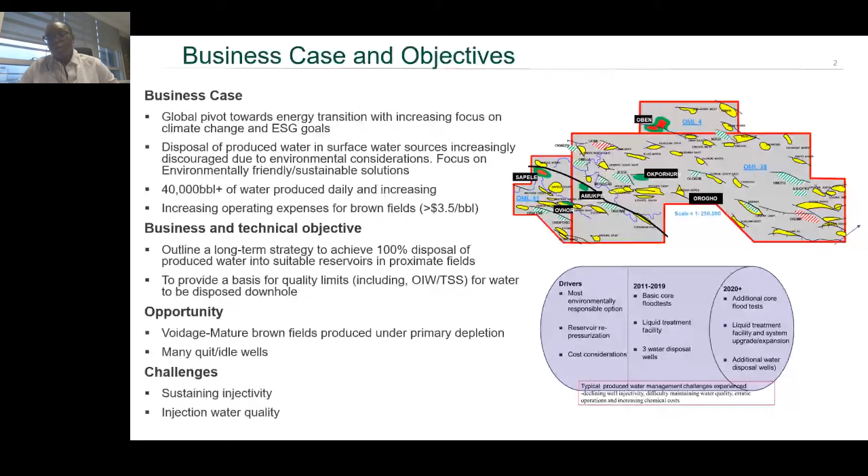The first step we took was to look at it in an integrated manner, bottoms up. The first question we asked ourselves was how do we select the reservoirs within which we would inject this water. We came up with about 9 screening criteria cutting across key properties. I would say accommodation space: we need a large enough tank to take this water. We looked at a cut of about 35 to 40 million barrels, something that will take us about 5 years at least per reservoir. We looked at reservoirs providing good isolation from surface and freshwater sources, that's very important, so you need good sealing shales, deep enough and far from surface water. Of course flow properties are key: porosity, permeability, and connectivity.

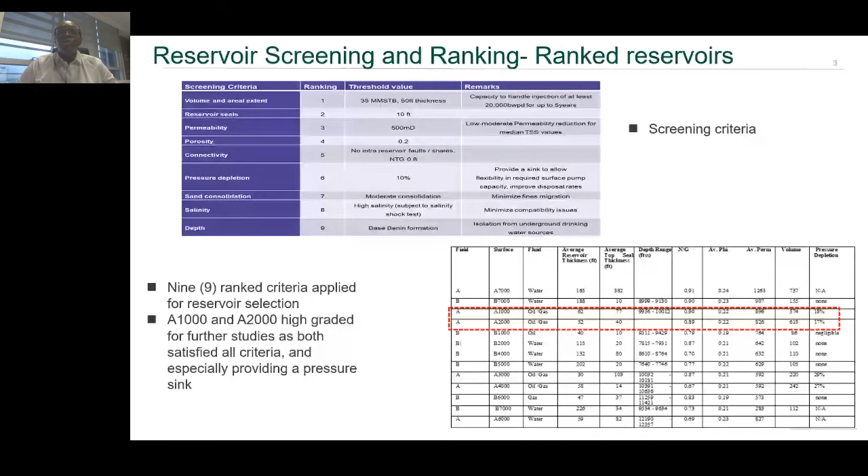We looked at a basket of about 15 reservoirs proximal to where we wanted to do this injection, close to our fields, and immediately 2 reservoirs stood out. They were big enough, had the right flow properties, and were deep enough with a pressure sink. We then went further to get a deeper idea of the internal architecture of these underground tanks, if I may use that terminology, to be sure that the plumbing, if I may use that word, was all well connected.

Just to confirm the flow capacity, we looked at the historical production. Between both tanks, they had a combined initial in-place volume for oil of 400, out of which we've produced slightly more than close to half of that volume, which has resulted in a pressure depletion of about 20%. So that means we have space, say about 200 million barrels of space, and pressure depletion, which will allow us to reduce the pressure head required to initiate and sustain injection.

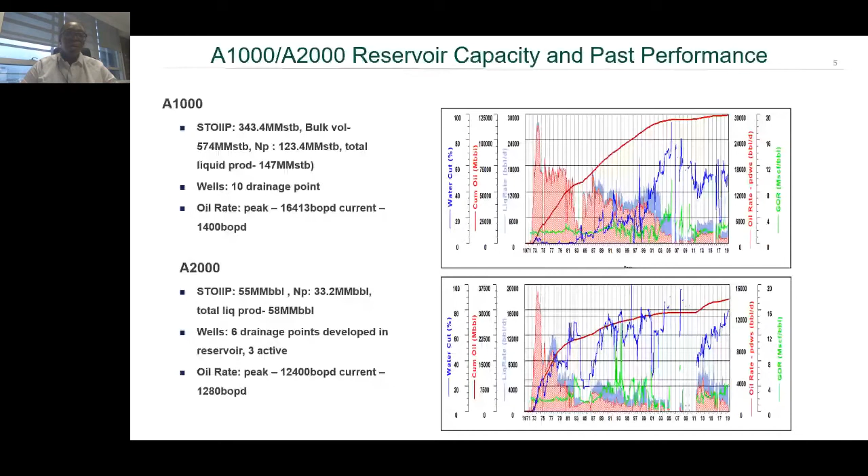The other side of it, which we looked at, is the reservoir rock itself, having a closer look at it. The first thing you do is find out if the formation water in this reservoir rock is compatible with the water that you plan to inject, to prevent any kind of permanent damage. So that was the first test. Water from all 3 flow stations that we operate was injected, and they were found to be compatible.

Then some characterization to know what kind of reservoir we're looking at in terms of quality. We saw two different categories of rock: one set with open secondary porosity and connected pores, so good permeability, and another kind with restricted overall porosity due to clay cements between the pore spaces, so lower permeability. Later on you'll see how these two respond differently to different qualities of injected water.

We carried out about 6 tests, which are listed here, but I'm only going to dwell more on number 5, which is the water quality sensitivity testing to suspended solids, because this one has the greatest impact on your injectivity.

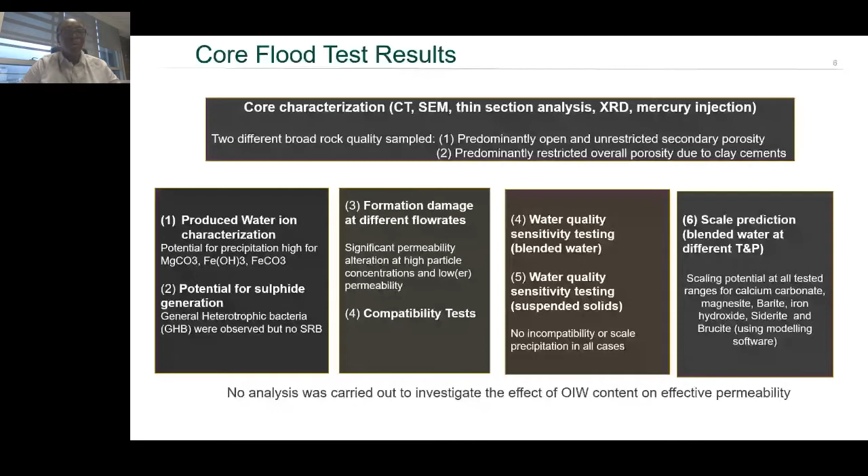Just to highlight how the tests were carried out, we had these core plugs. I'll start off with these pictures. This basically shows how the core plug looked like before water injection, and the last two show how it looked after injection. You can see that solids, particles, have been deposited on the surface of what is referred to here as the wellbore, which is pretty much what we expect.

To go into a bit more detail on these experiments, we had core plugs of different qualities, that's the in situ or original permeability. Then we injected produced water with different qualities or concentrations of suspended solids. There's a low concentration with a maximum particle size of 2 microns, a medium concentration with a maximum particle size of 5 microns, and a high concentration with a maximum particle size of 10 microns. Overall, we saw the greatest permeability reduction in the case of low permeabilities combined with high suspended solid concentration.

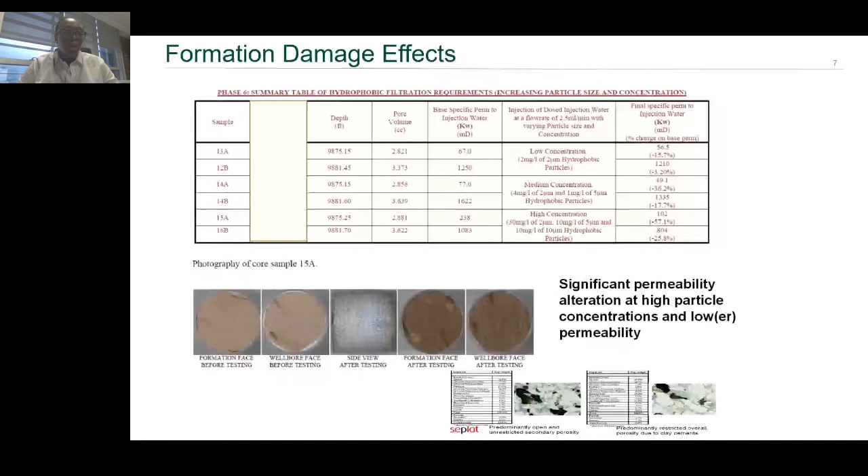Within these reservoirs, the kind of pore throats we're looking at have an average size of 10 to 14 microns. We tested 3 qualities of water with particle sizes of 2, 5, and 10 microns, and you can easily see the impact in the chart on the left. In the case of low concentration of suspended solids with 2 micron particle size, there's virtually no reduction in situ permeability, irrespective of the original permeability. All the way from initial permeabilities of about 100 millidarcy up to 2 darcy, you don't have more than a 15% reduction in permeability.

However, once we get to the range of 5 microns, the medium particle concentration, that impact begins to show up, close to 40% for the lower permeabilities. And once you get to 10 microns, in some cases you're losing as much as 80% of your permeability.

This is well explained because we know that in order to minimize the deposition of particles at the wellbore, you need to keep your particle size about one-third of your pore throat size. And if you want to prevent this deposition from plugging the pores within the reservoir itself, you need to keep it at one-seventh. You can imagine the kind of constraints this will impose in terms of filtration and other requirements for injected water.

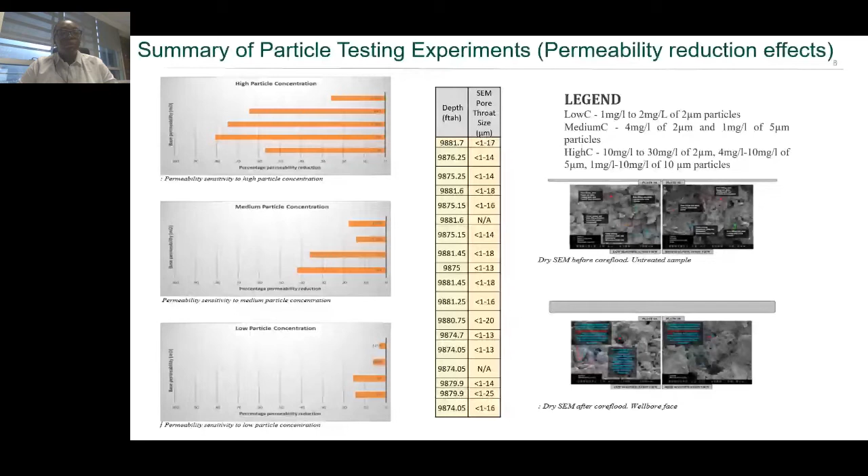The other connection you want to make is how this water gets into the reservoirs. Like I mentioned, we first went through our entire stock of idle wells, picked out a few in good quality portions of the reservoir. First thing you want to do is confirm the integrity, that the casing is able to provide the isolation needed for safety reasons.

Select the right materials, and then go into your workover, pull out the existing old tubings. Most of these wells were drilled in the 70s. And then we put in new tubings, most of them 4.5-inch, because we're looking to inject between 10 to 20,000 barrels per day of water.

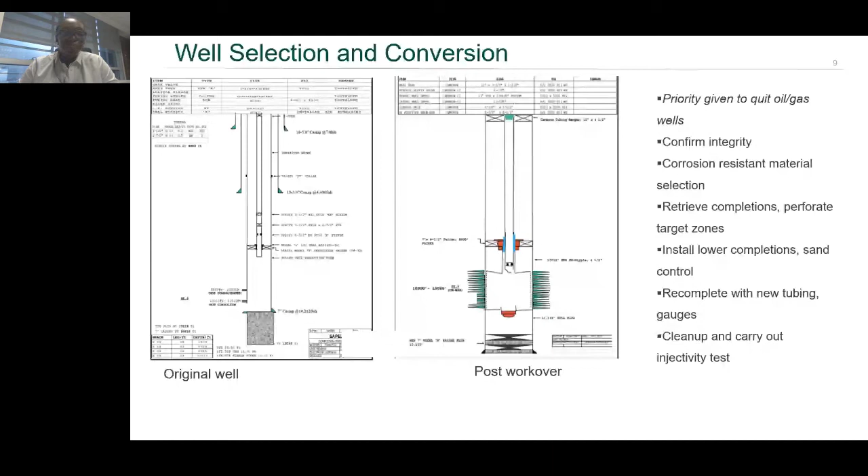In the modeling, we try to model the injection process in dynamic modeling at a limit of 80% of the reservoir fracture pressure. We were able to attain that, but of course this is on the assumption of totally clean water, since you cannot, with the current software that we have, model those effects of particulate matter.

So in practice, what we found is that we typically do attain our intended initial injection rates, but because of the water that we inject, we have challenges in maintaining these specifications. Typically what we found is that the water quality that gets in, although in terms of concentration it stays within the limits, the particle sizes tend to hover in the extremes between 5 to 20 microns. So over time, you begin to see this natural decline in injectivity, which is a well documented phenomenon.

And once you catch it on time, you're able to carry out some intervention processes to restore injectivity to your well.

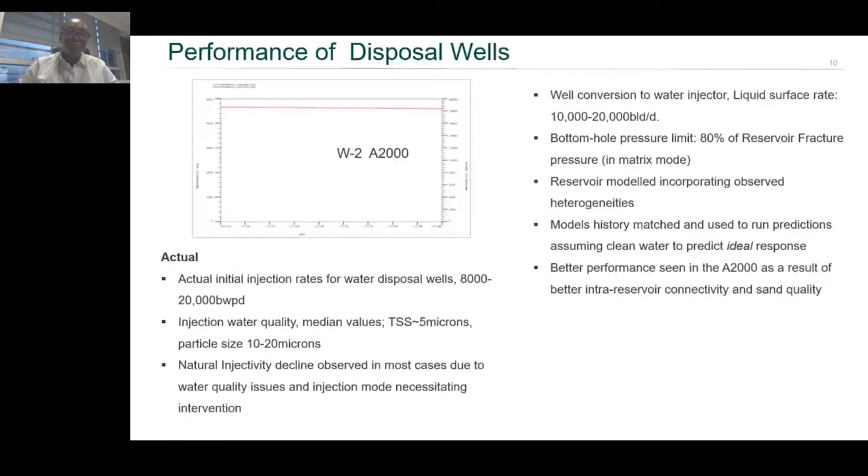Water quality is really a big one, because you want to, as much as possible, maintain that level of production that you've set for that well. And we've demonstrated clearly that this is impacted by the quality of the water, the suspended solids, the concentration of oil that you have within the water you're trying to inject, microbial activities, and fines migrations, which is related to the velocity of water during injection.

But coming out from all this, from the experience with the wells that we have and the core flood tests, which I've shared some of the highlights of, we came up with a couple of guidelines suitable for at least the reservoirs within the acreages that we're looking at. And these are used now to design the filtration and treatment systems that we have upstream.

Suspended solid concentration of 5 milligrams per liter, maximum particle size of 5 microns if injecting in matrix mode, and 10 ppm. We relax it a bit if we're able to inject in fracture mode.

We also find that injectivity is more easily maintained if you inject continuously rather than as a batch process, because that way you're able to keep some of those small fractures that you create within the reservoir open. Anytime you shut in, those fractures close, and it becomes more and more difficult as you continue to open and close to keep those pathways open.

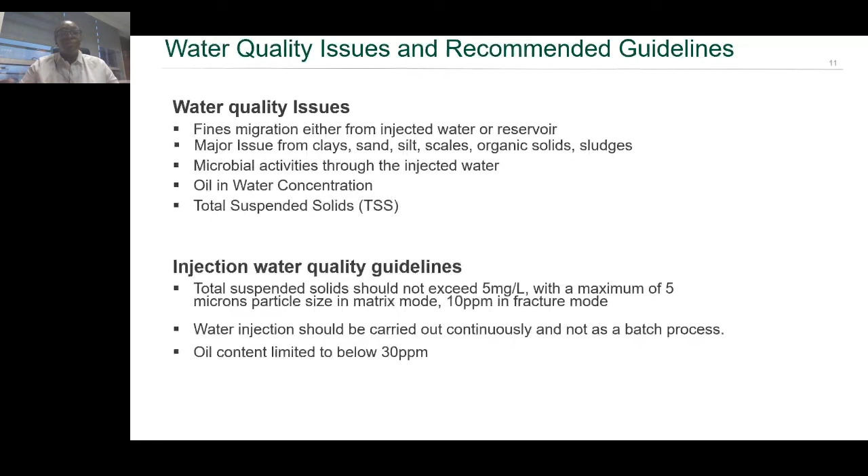Surveillance is a very key part of the injection process. The reason is because you want to be able to be proactive rather than reactive in the way that you treat your reservoir. Sort of like taking vitamins and eating well to keep healthy rather than waiting till you get ill to see the doctor.

So permanent downhole gauge is absolutely essential for an injection well, because it gives you an early warning signal to know when things have begun to deteriorate and says, hey, I need to do something at this point.

It's really, really advantageous as well if you are able to have a continuous measurement of your water quality and your metering and control to each well, because this really helps you to troubleshoot and diagnose issues when they arise. One of the areas that we are just beginning to look at as well is thinking about, hey, what if we could...

Proactively, even ab initio, predict when injectivity is going to begin to drop. And I think you will hear a bit about that in a subsequent presentation.

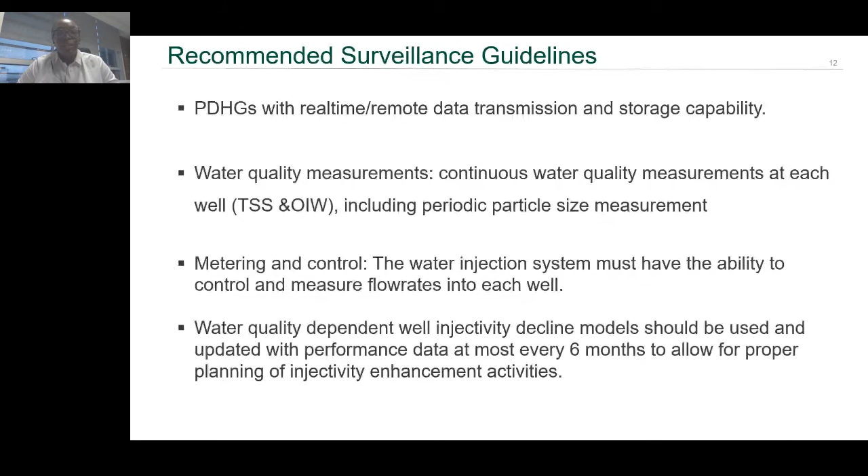So really, downhole disposal is definitely the way to go. That has certainly been our experience. Once you do your planning properly, you select your candidate reservoirs, you have the right production practices and the operating limits. If you're operating in a brownfield, you're spoiled for choice on where to put it.

It definitely checks the boxes for any energy company. It checks the boxes of being environmentally friendly. It checks your cost boxes because it does provide you a very cost-effective way of reducing your OPEX - very critical in this era of price volatility for oil - and it checks the boxes of putting you within environmental regulation. So definitely, underground disposal is certainly the way to go.

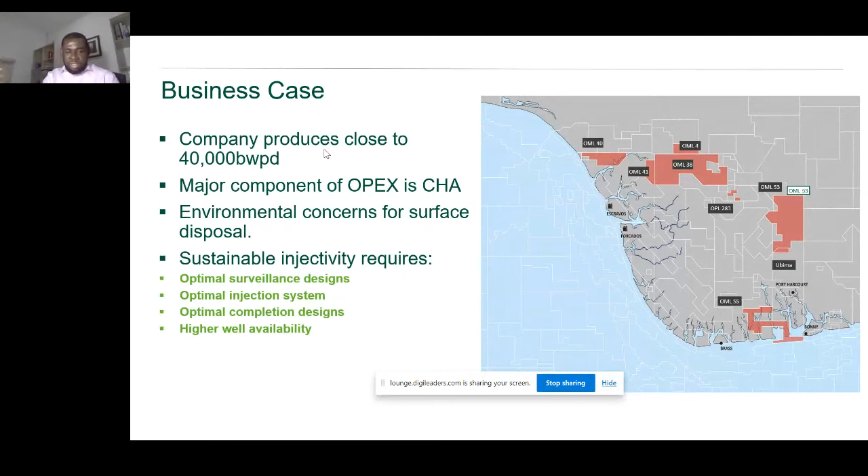Sustaining the initial level of water, as we know, is really hard to achieve - the last speaker spoke about that - in matrix mode, even in fracture mode. Apart from the limitation placed by environmental regulations, keeping these fractures open after long shut-ins is also a major issue. While we acknowledge that the best way to dispose is at fracture mode, this tool that we developed is useful for understanding variables that are fundamentally key to operating surface injection systems at optimal level, especially in terms of water quality requirements, as the last speaker alluded to.

As you can see from the performance of one of our injection wells, even with relatively constant injection pressure, the injectivity declined gradually over a period of time. When we used a Hall plot to look at whether this is a wellbore issue, you can see the signature of the Hall plot indicating that it's indeed a wellbore damage issue.

Thus, injection wells would require intermittent stimulations, and injectivity half-life, which is the time required for the injectivity to drop by half its original value, could be used to plan interventions.

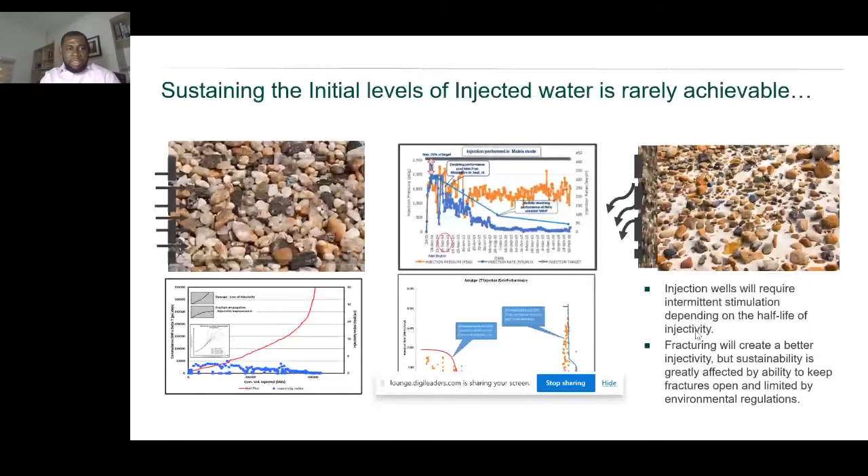What we see as the critical factor for loss of injectivity is, of course, permeability reduction, which has already been alluded to, coming from fines migration and microbial activities in the injected water. I'm not going to talk a lot about the core flood test, because this is something the last speaker discussed in detail. But indeed, based on our core flood experiment, we were able to identify some of the things that contributed, within our own field and operational conditions, to a reduction in injectivity.

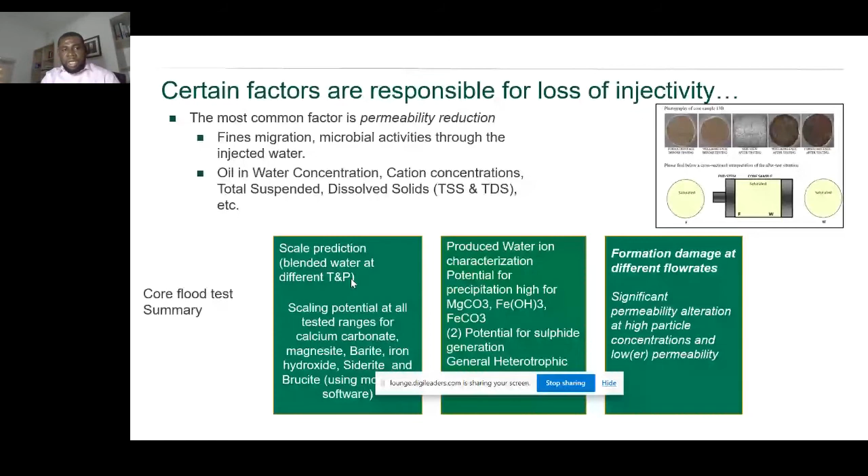And so, based on understanding of the mechanisms for injectivity decline, we developed models to be able to predict and estimate some of these parameters that are affected. Based on a review of several works by different authors, 4 key mechanisms have actually been identified.

The deep bed filtration mechanism is the first stage. During this stage, accumulation reduces pore space and blocks thin pore throats, leading to permeability damage. If you plot impedance against dimensionless time, as shown on the right-hand side, you would get a slope that is less than unity on a relative scale for deep bed filtration. As porosity reduces and moves towards critical porosity, accessibility of inflow particles drops to zero, and the average pore size of the external filter cake becomes far smaller than that of the rock.

So during this period, that's the external filter cake development period. If you plot impedance against dimensionless time, you have a slope that is greater than unity on a relative scale. So the drop in injectivity is faster at this stage.

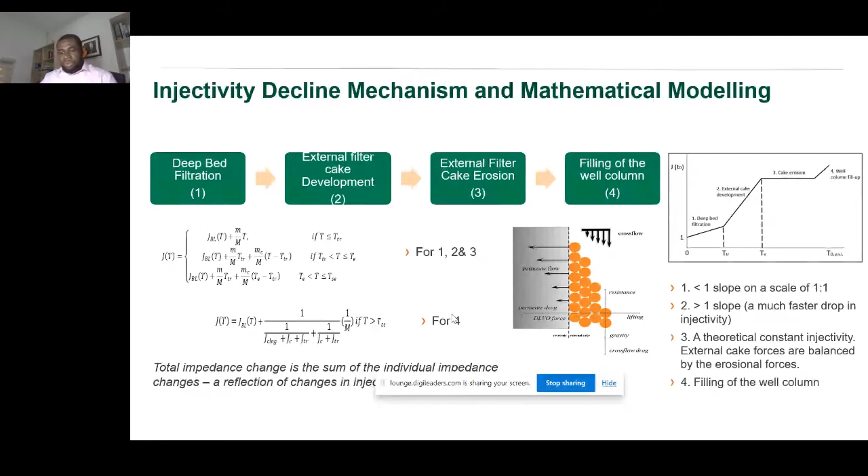It also allows us to enter reservoir characteristics information such as porosity, permeability, size of the reservoir for calculation of storability and flowability for the deep bed filtration mechanism. And it provides us the opportunity to enter information on the quality of the injected fluid, so we can run sensitivities to determine the best operating envelope for our facility.

And then, of course, we can also enter initial guesses of the filtration properties, which I spoke about in the equation, such as the filtration coefficient, the filter cake permeability, and all that.

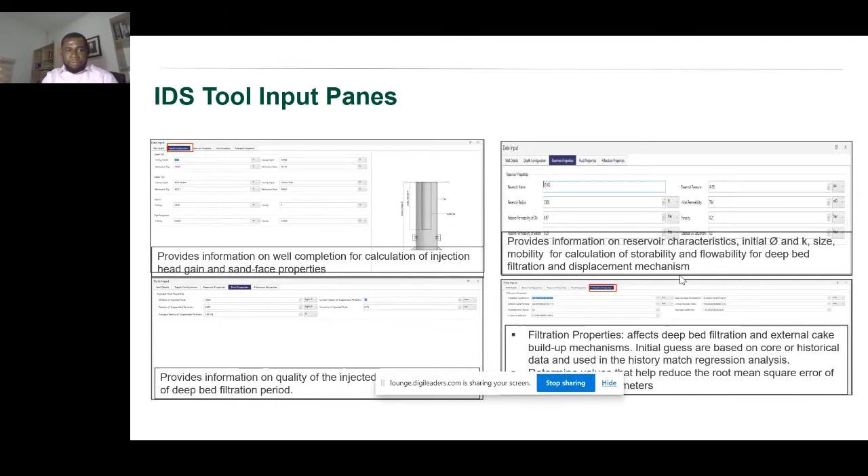So in terms of our case study, we picked 2 of our wells, out of the 3 wells, to carry out some kind of calibration and look at how the model will work. I'm going to be presenting results for one of the wells.

So this well is a water disposal well that was completed in a reservoir with average pressure of about 4,100, about 0.8 Darcy, and initial average porosity of about 21%. The completion strategy was a mill casing gravel pack on a single string, and we targeted 10,000 barrels of water as injection rate. Initially we were able to attain about 75% of the target within the first year. If you want to see more on this, you can go to the full paper.

The treatment facility, which I think has been discussed in the first paper, is a 3-bank 50,000 barrels facility, which provides injection water of average TSS of about 20 parts per million and 16 micron. Before that optimization, that led to a reduction to 10 ppm, 20 is what we're looking at.

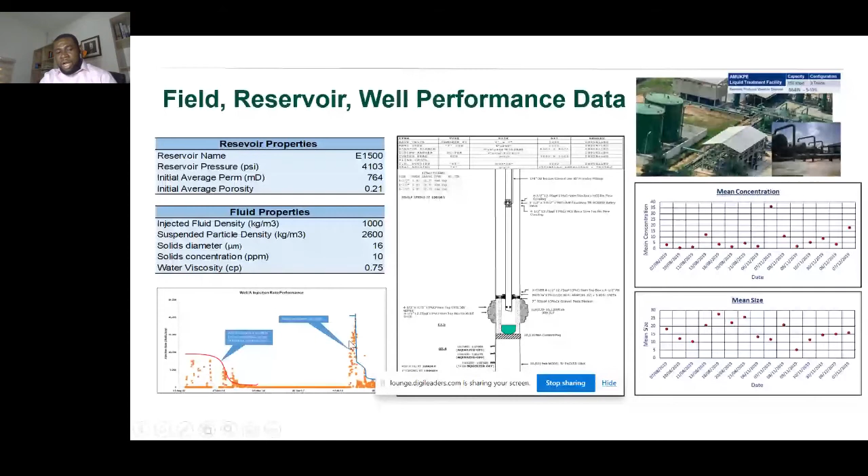So in terms of the model analysis, we added injection pressure to the plot you saw in the last slide. You can see in the well injection and pressure profile, the pressure is relatively constant. Let me see if I can get a pointer here. So the pressure is relatively constant as the volume of water injected drops.

So the Hall plot, which we've incorporated into the tool, indicates clearly that this is a well-bore phenomena affecting injectivity decline.

So in the history match plot here, this is coming from the tool. The effect of intermittent injection, which you would have noticed in the production performance plot, is removed in the treatment of time by making that time dimensionless. The three phases you can see here correspond to the first three mechanisms I spoke about earlier.

First, you see a relatively slow drop in injectivity during the deep bed filtration stage. Then you see a faster drop during the external cake phase. And of course, the steady state phase, that's phase 3.

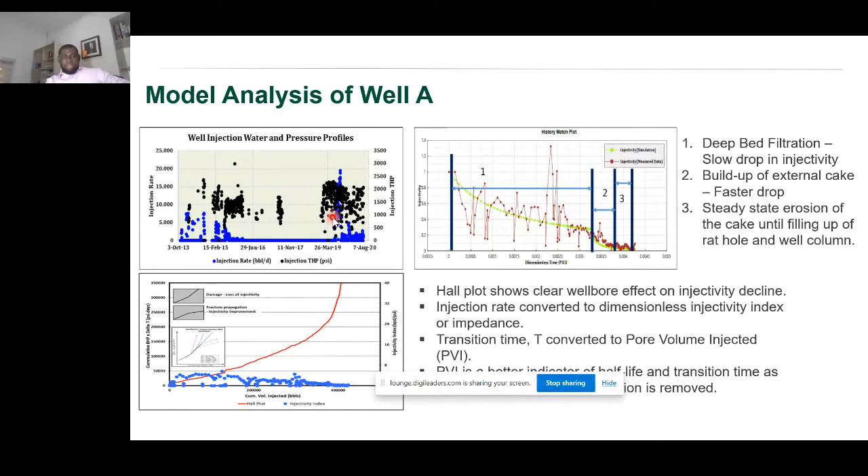So further on the model analysis, what we notice is that for period 1, which we estimated the injectivity half-life at 0.0013 PVI, which corresponds to about 300,000 barrels of water injected. So after injecting 300,000 barrels, half of the injectivity index dropped by half.

Without intervention, prediction will continue in steady state mechanism until we can no longer take in water. When we conducted sensitivity analysis to look at how the total suspended solids concentration affects the half-life, a 5 ppm increase in TSS can lead to as much as a 100% decrease in injectivity half-life. So this understanding has been key to our equipment design and optimization plan.

So in conclusion, I would say that the tool is useful for quantifying the impact of water quality on injectivity. Prediction of injectivity half-life can be useful to plan short-term intervention, both for new wells as well as for existing wells. Our database of filtration parameters, which we are trying to build, will be useful in optimizing future water injection system expansion projects.

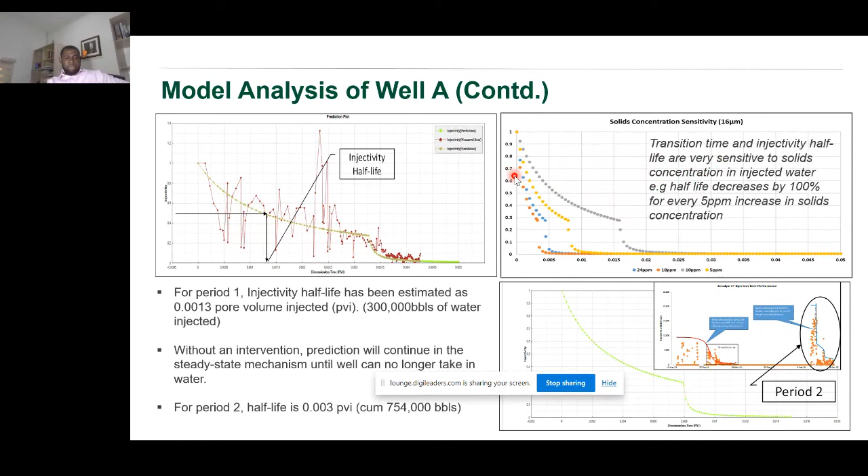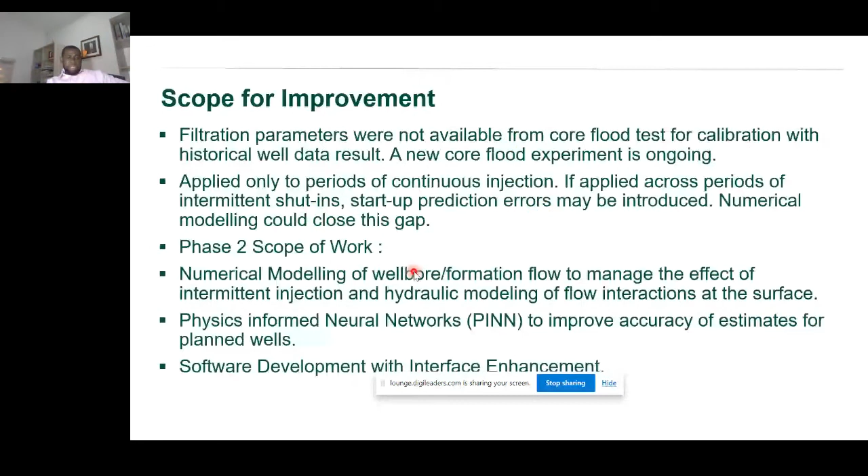We also believe there is additional scope for improvement, especially in the area of numerical modeling and physics-informed neural networks, because this will help us improve the accuracy of estimates of the initial condition after we have a prolonged shut-in.